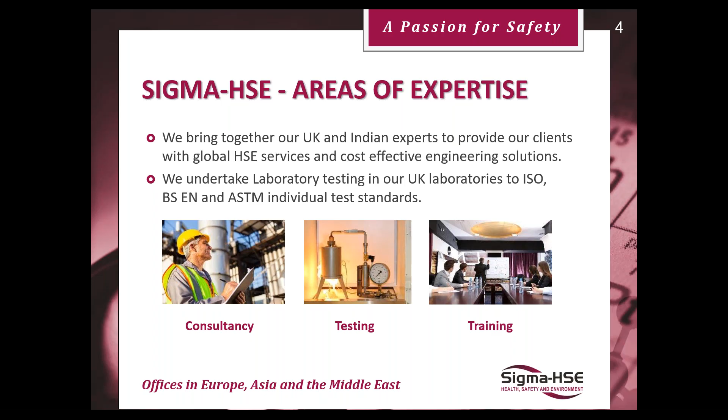We've got a team of highly qualified engineers and scientists. Some people sit on standards committees, and we've all tended to work within the process industries in one shape, form or another. And of course, we've got the resources of the laboratory for our fire explosion testing and so on.

So we can offer quite a large scope in terms of the things we're interested in doing, and things that these days perhaps many industries, many companies on their own have limited experience in - some of the tools and techniques we use to get a grip on many of these assessments and understanding of hazards.

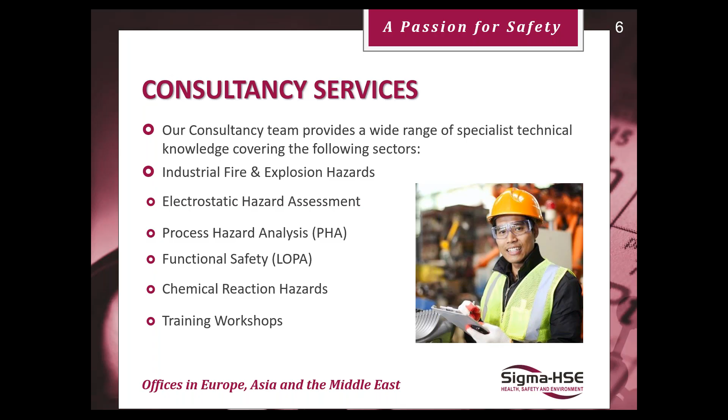So what I'd like to do today, over the next hour, is talk about basis of safety. I'll start off as simple and holistic as I can be on what the basis of safety is, to make it clear in everybody's mind, and what knowledge we need to understand before we can develop that basis of safety.

And we'll then have a look at standard, if I can call it that, basis of safety, because like with everything, there's many ways of doing things. It's the same with basis of safety - there's many options you can take within our processing operations, and I'd like to take you through some of the accepted best practice where basis of safety is concerned.

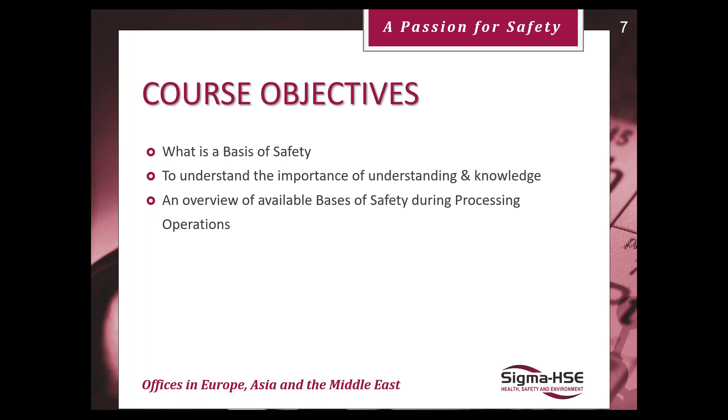So really the definition of basis of safety is a combination of measures, safeguards, barriers - call them what you like - that we rely upon to ensure our safety, to give us some protection. Because on the whole, in the processing industries, we do handle a lot of hazardous materials by definition, and sometimes at quite severe operating pressures and temperatures.

So there is the scope in many of the processing industries to do a lot of harm, either to ourselves as humans or to the environment or indeed to the business.

So the basis of safety is all around putting in place measures and barriers to prevent, control or mitigate bad things that could happen. Clearly, to have a sound basis of safety, we need to understand what can go wrong, because it's only with that knowledge of what can go wrong - our hazard identification and our knowledge about the hazards and when those hazards may become realised - can we then consider putting in place measures, and what types of measure, to deal with these things, either to prevent the hazards in the first place or to control and mitigate them if those hazards become a reality.

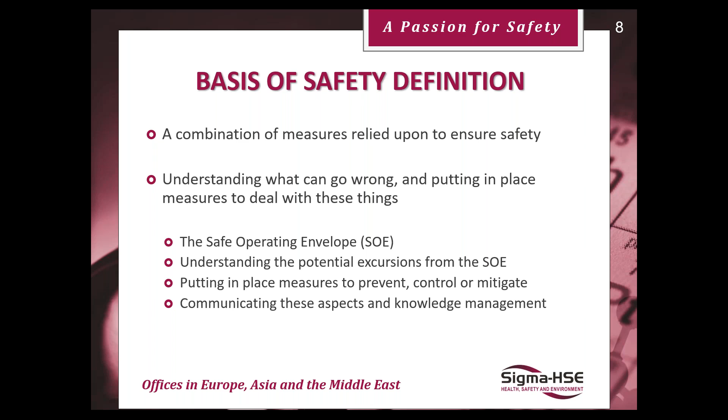So the basis of safety is built up on this knowledge of the safe operating envelope, which, as I say, we're generally quite proud of and quite knowledgeable about.

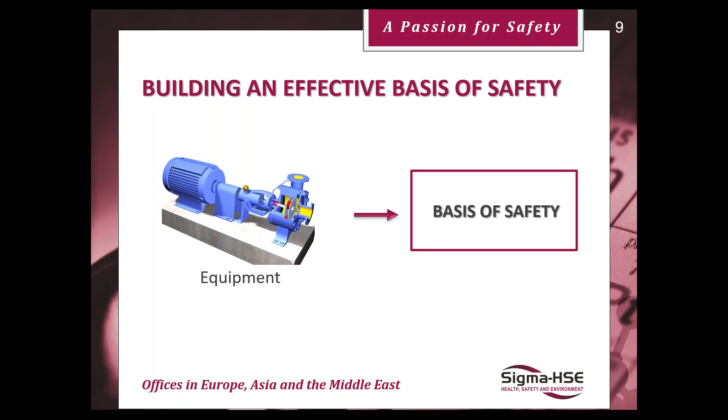And of course, to keep us within that safe operating envelope, we'll have items of equipment that help us stay within that basis. We'll have procedures that we follow, whether we're doing maintenance or operations, to do things correctly.

We need to understand how we're going to detect that we're starting to deviate from our normal operating conditions or processes - this knowledge of potential excursions I've been talking about.

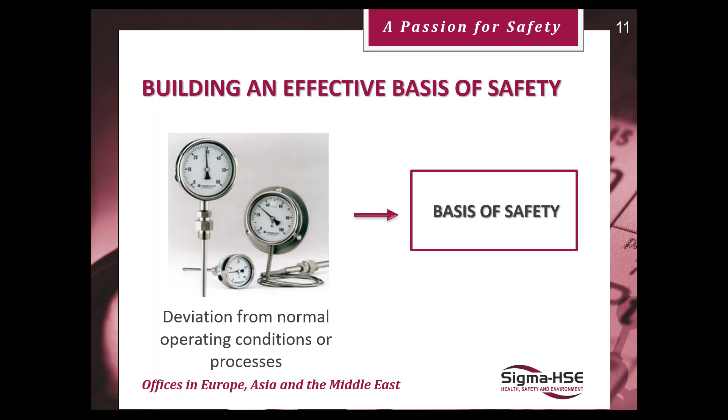Of course, people are involved, so there's an element of human factors there. Do people know how to operate these barriers that we've installed as part of our basis of safety? Have the designers designed them correctly? Do the maintainers maintain them correctly to make sure they're effective?

Because after all, these barriers, these measures we put in place, on the whole should never operate. They're there to give us protection if we go beyond our safe operating envelope. And very often, going beyond these safe operating envelopes is very infrequent - these are often our last lines of defense before something goes really bad.

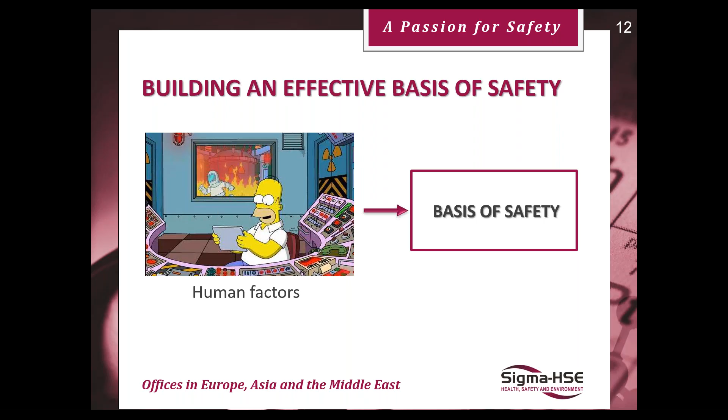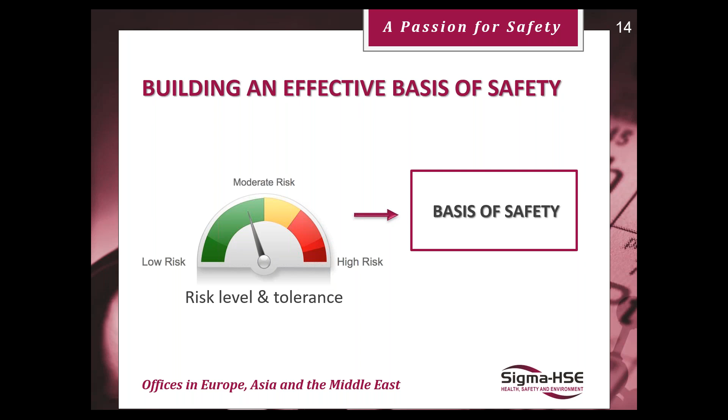We've got to understand the properties of the materials used, because often many of them are classified as dangerous. So all of these things fit in, as well as an understanding that we can't really eliminate all hazards and all risks. There's a certain level of risk tolerance that your company, or the regulator, wants us to take, because we don't want to be wasting money reducing risks that are already acceptably low. So there's an element of making sure that, yes, we can keep adding these barriers, but we need to satisfy ourselves when enough is enough, when the barriers we've got give us the level of protection we require.

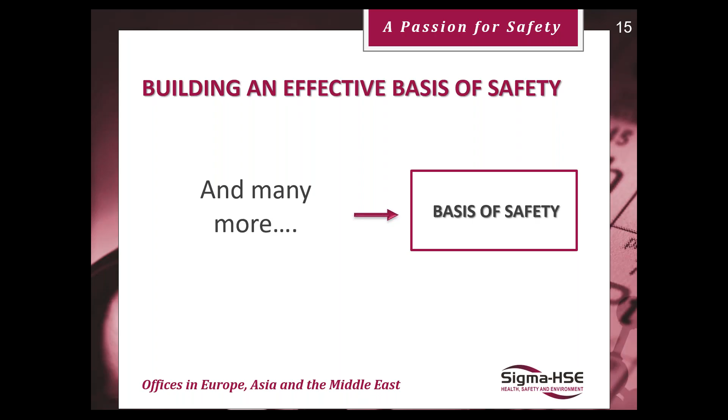And of course, there are many more aspects of it, especially if you're a site that's got significant major accident hazards. The demonstration of this control, the demonstration that the design basis and the basis of safety, and that the equipment and barriers you've installed will be effective when called upon, is—if you have to produce a safety report to put in front of the regulator—quite intensive these days. That demonstration, that justification that what you've done is sound and reduces the risks from those hazards down to an acceptable level. So basis of safety is very important, but we'll get a bit more specific now.

If you look at the ATEX legislation in Europe, or in the UK the DSEAR legislation—the Dangerous Substances Explosive Atmosphere regulations—those specifically use the term basis of safety, and it's a basis of safety to prevent and manage fires and explosions. That's what those regulations are concerned with.

And when you look at them, if you just think about it logically, fires and explosions come about when we allow the fire triangle to be joined up. That simple little triangle says that for something to combust, we need a fuel, we need air or oxygen, and those two need to be within certain proportions. Otherwise, they'll be too lean to burn or too rich to burn. And then we need an ignition source.

So of course, if we're within the flammable limits of a flammable liquid or the vapors from a flammable liquid, one obvious way of preventing an ignition is trying to avoid generating those flammable atmospheres, trying not to work within the flammable limits. That's one way we can prevent ignition—prevent having a flammable atmosphere.

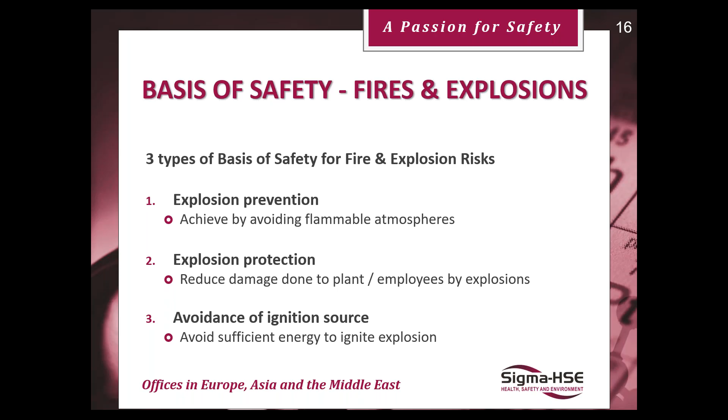So we've got two ways there of trying to prevent a fire or explosion: don't have a flammable atmosphere, don't have a fuel-air mixture, and don't have an ignition source. That breaks the fire triangle. But of course, it might still happen, because we exist in a life that's risk-based, so we can do our best to avoid creating a flammable atmosphere, do our best to avoid having an ignition source, but occasionally it will happen. And therefore, if there is an ignited event, we need to make sure that we can protect ourselves from those fires and explosions, so we're not sending missiles around the plant or off-site, which could harm people and damage assets and so on. So there's an element of explosion protection as well built into the basis of safety.

In terms of explosion prevention, we can limit the risk associated with handling fuels. Can we use a fuel that's less flammable or non-flammable if possible? Because clearly then we can't have a fire or explosion. Can we mix a non-flammable material in with another liquid to increase its flash point? Simply adding water to alcohol increases the flash point.

If we're dealing with powders where dust explosions could be an issue, can we work without having fine powders? One of the best ways of doing that is to keep our powders in damp or paste form. They're not so easily raised into a cloud to form that flammable atmosphere. Or avoid very dusty powders by deliberately using pellets or granules rather than powders.

Related to the fire triangle, we can also keep below the minimum explosible concentration for powders by making sure there's more air there, so there can't be an ignition because it's too lean to burn. We've reduced the fuel concentration when we make a dust cloud to the point where it's not ignitable.

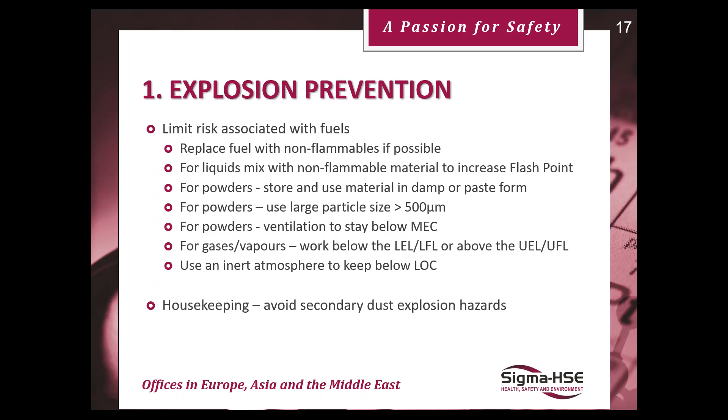We've got to remember that if we're working with combustible dust, it's really not possible to remove the fuel. It's going to be present. Even with most powders, it's all a function of the particle size distribution. As I said earlier, powders are okay if they're larger than about 500 microns. But many powders can undergo attrition and break down over time, or if you're transporting them in screw conveyors or pneumatic transfer lines, very attritable powders can break down and create more dust. So it's a bit difficult to remove the fuel.

For gases and vapors, we can do this by having sufficient air that we're below the flash point, below the lower explosive limit, and ensuring our systems operate that way so we can't have an ignition. Some processes do work above the upper explosive limit. Lots of printing processes are designed to operate above the upper explosive limit when handling solvent-based inks. Although these days there's a lot less solvent-based inks used in processes than there used to be. There's many more water-based systems now and cleverer systems, which has inherently removed the possibility of a flammability issue.

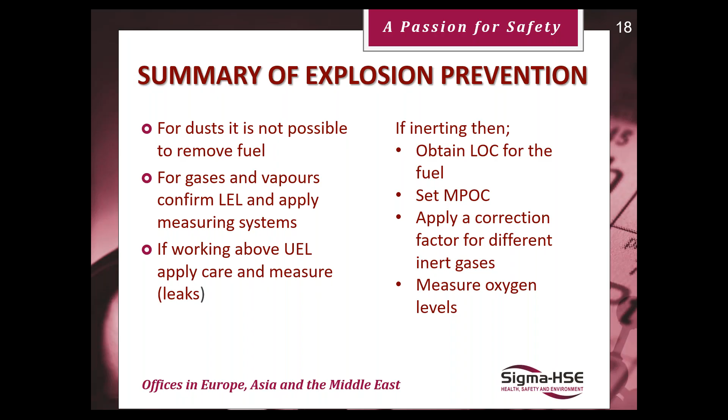And of course, as I said before, we can inert, but the inertion's got to be good enough. How much oxygen is required for a given substance to burn or explode is dependent on the specific substance. It's called the limiting oxygen concentration, or the maximum permissible oxygen concentration. If you're using inertion, you need to be below these values and know that you're below them, to give yourself justification that you've reduced the oxygen level in your systems down to a level with a safety margin that won't ignite. Then you're protected against the fires and explosions that could occur.

When we're looking at explosion protection, when we try and put things in place to deal with having the ignited event, these are generally done for fires and explosions in three ways. We can either contain the explosion, we can vent the explosion overpressure to a safe location, or we can suppress the explosion by injecting extinguishant into the incipient explosion.

But with all of these techniques, because we've got different bits of equipment generally in series or in parallel linked to each other, we've got to have means of isolation to stop the flame front or the explosion pressure trundling off into the next piece of equipment upstream or downstream. Of course, there's different ways of doing this, and I'm not necessarily going to go into the detail of the different levels of containment.

I think it's self-evident. With containment, we have a knowledge of what the maximum pressure and the rate of pressure rise is if we lose control and have the ignited event, and we make sure that the containment system can withstand that maximum pressure and rate of pressure rise, so nothing comes out of the containment vessel. The explosion's contained within it.

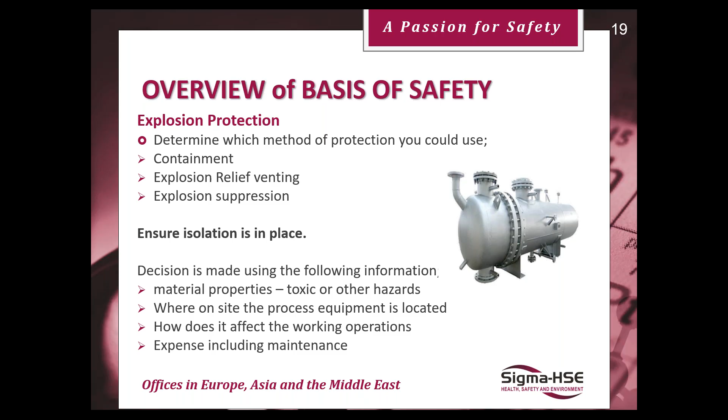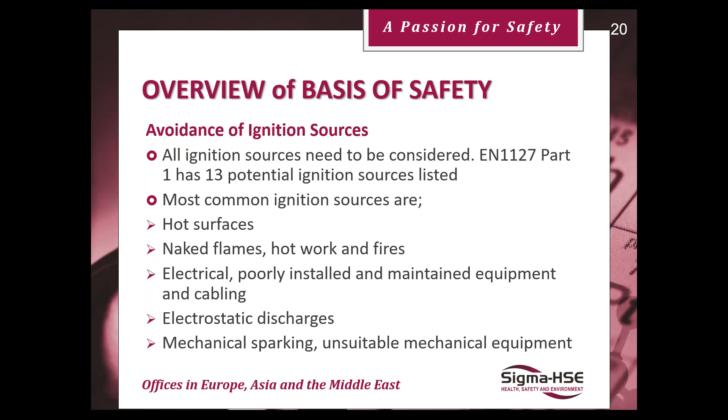But as I say, process safety specialists tend to work on the premise that basing our basis of safety purely on elimination of ignition sources is something that we don't feel comfortable with, because it's very difficult to eliminate all potential sources of ignition all of the time.

But it's important that if we do get that ignited event, things can get a lot worse if we don't have this isolation between items of equipment on our plants. If that fireball and overpressure can go down ductwork into other pieces of equipment, the pressure, by things called pressure piling, can essentially be a lot higher than what it was in the first place.

So you might have a P max, for example, maximum pressure developed in an explosion in one reactor that's, let's say, 8 bar. But if that was to go through to a similar reactor, because they're connected, because of this function of pressure piling, you might see 10 or 12 bar in the second reactor. So even if it's rated as 8 bar, it still won't do the job. So having this rapid isolation - and we can do that in a number of ways - quick acting valves that will require some detector system again to shut.

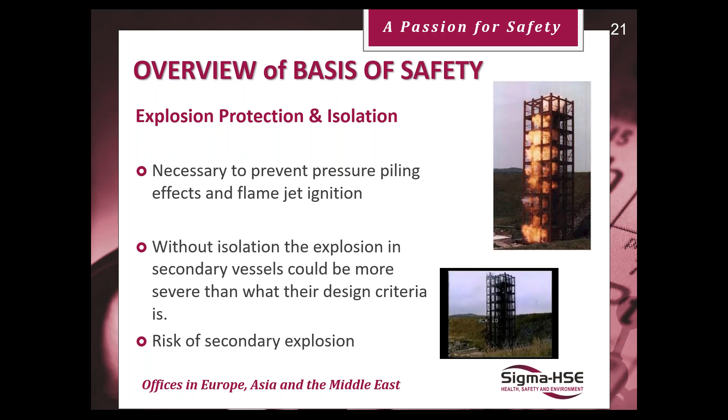But of course, we must have that knowledge of what we need to do to be able to get ignition. So the sorts of data that's really important to us when dealing with gases and vapors and trying to avoid fires and explosions is knowledge of the flash point - the lowest temperature at which a liquid will give off sufficient vapors, which if it comes across an ignition source, it will flash.

And if your flash point is less than ambient temperatures in the UK, that means if you spill it, if you have a loss of containment, it will give off sufficient vapors to be above the lower explosive limit. So if there is an ignition source, it will become readily ignitable.

Auto ignition temperature is another important parameter we can use to make sure that equipment that runs hot isn't hot enough to ignite material. Auto ignition - release of the substance at above that temperature will ignite. It doesn't need a separate source of ignition to ignite it.

You've got to be careful with auto ignition temperature. You'll find it easy to pick up auto ignition temperatures from the literature for all manner of solvents that we use in the process industries, and they're pretty high - generally around 400 degrees and this sort of thing. I think the auto ignition temperature for something like hydrogen is around 500 degrees C.

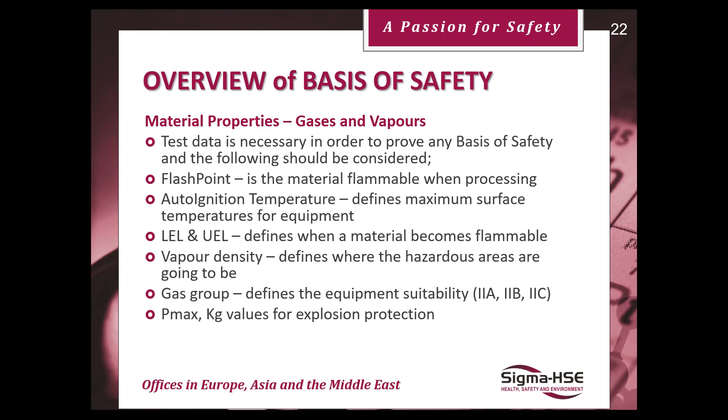When we look at powders and dust, it's a bit more involved, but again, it's just measurements, and there's an awful lot of physical data out there for flammable vapors, liquids, and gases. You don't really need to do much testing.

But where powders and dusts are concerned, there's less available in the literature, and what's quoted really gives you a false sense of security, because the problem with powders and dusts is the particle size distribution and the amount of dust that's present and how readily that dust forms into a cloud.

If you look through the literature for things like minimum ignition energies, minimum ignition temperatures of standard materials - flour, wood dust or whatever - you'll find they never quote what the particle size distribution is. So it's always best with powders and dusts, if you're using particular substances, to get those specifically tested in laboratories to get at these figures.

Because in many respects, the minimum ignition energy is what it says - how much energy do you need for this particular material, how much energy is necessary for it to ignite. And that can range from tens of joules down to literally 1 or 2 millijoules. There's a big difference. Some things are a lot more frisky than others.

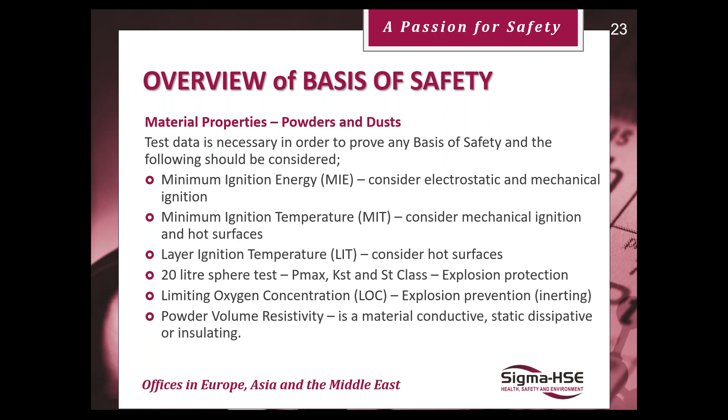And it's the same with minimum ignition temperatures. Some things have got to be really hot before they'll ignite. Some things will go at relatively benign ambient temperatures. We can all get at this sort of information from the testing of the material properties.

Moving on, I've looked at fire and explosion, but basis of safety is also important when we look at reactive chemistry, because we need our basis of safety there. We need measures in place to deal with excursions from our normal reaction chemistry, because if we lose control of our reaction chemistry, all manner of things can change. Kinetics can change, thermodynamics can change.

We can change the chemistry altogether and make totally different materials. For example, if you remember the Seveso incident in Italy, the normal chemistry they were doing was quite benign, not really using any dangerous substances. But if it got too hot and went into exothermic runaway, the chemistry changed and they started producing dioxins, which are very toxic materials. Although they didn't blow the plant up because it was protected against pressure via a vent on the reactor, the chemistry had changed and made all these dioxins, and it was those that were sprayed out of the vent all over the neighbouring countryside, which harmed people and harmed the environment. So it's this understanding of what can go wrong.

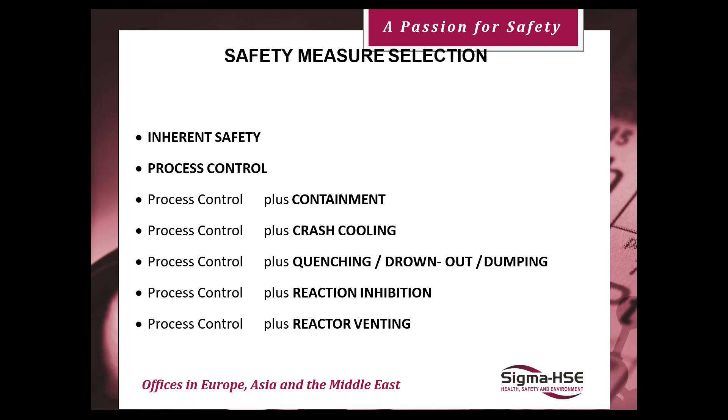The first way is inherent safety, where we ask: if we lose control, would it cause a hazard? It's often considered a theoretical concept, because as humans we don't like changing - if we've always made this stuff this way, then this is the way we'll always do it. But it's about questioning, can we do things that are inherently safer? Can we eliminate those hazards? We can only do it at the really early stages. It's a technique chemists should be more and more involved in, looking at inherent safety.

Do I need to use a high volatile solvent with a low flash point? Could I get away with one that's a higher flash point? Can I use a catalyst in the system rather than having to operate at high pressures and high temperatures? Very often, if we can design out hazards and remove hazards, our plants are a lot cheaper to build, and cheaper to operate throughout the lifetime, because we're not having to put all these measures in to deal with these hazards, which we generally build into our processes.

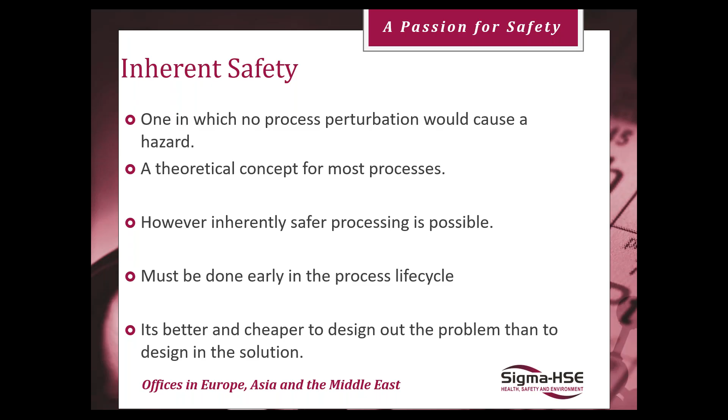So inherent safety is around specifically thinking about: can I substitute this material? Can I use a higher flash point solvent? Do I need to operate at pressure? Can I minimize the quantities?

This is where we've done a fair bit of work over the years. It's very rare now, outside polymerizations, that we see batch reactors where we put all the ingredients in, shut the lid, warm it up and let it go on. We tend to use semi-batch and increasingly continuous processing for our chemical reactions, and these allow us to minimize quantities.

I can't have a release of 10 tons of a toxic material if I've only got 2 kilos of it floating around the reactor system at any one time. Can I moderate it? Can I use catalysis to help us operate at lower temperatures or lower pressures? And can we try and keep it simple? It's something which just requires a different thought process in the early stages of process design.

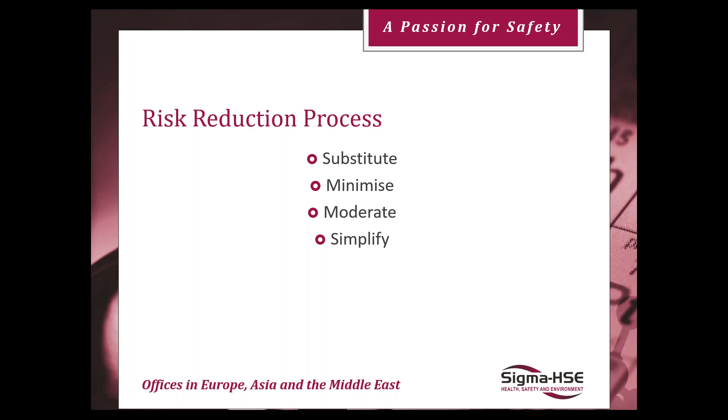It's a nice to have, something we need to focus on more as we go through life, and we're being pushed to do this more in Europe, at least by the regulators. But it's fair to say it's not common to put new processes in anymore, so we have to live with our existing processes. We need to understand the basis of safety that's there for our existing processes.

I've given this simple little example here, and I've come across this numerous times. Reactors are heated by steam - here's one, it's got 300 degrees C steam input to the jackets on the reactor, and they're doing chemistry where they want to do the reaction at 85 degrees C.

One of the excursions you'd look at, and they knew about, was if the reaction mass got up to 160 degrees C, they had a thermal decomposition that resulted in a lot of gas generation and a runaway reaction. So something they tried to avoid.

So they did lots of work and put in big relief vents on the reactor and everything else. If they'd simply plumbed the reactor cooling heating system to use hot water rather than steam as the heating medium, hot water can't go above 100 degrees C. You've got a comfort margin of 60 degrees C before your onset temperature for decomposition at 160 degrees C. You've effectively eliminated the possibility of that decomposition.

It's inherent safety in practice. We need to get used to this. The only reason why steam was used on that actual reactor for this product was because that's what it was plumbed in as, and had been for years.

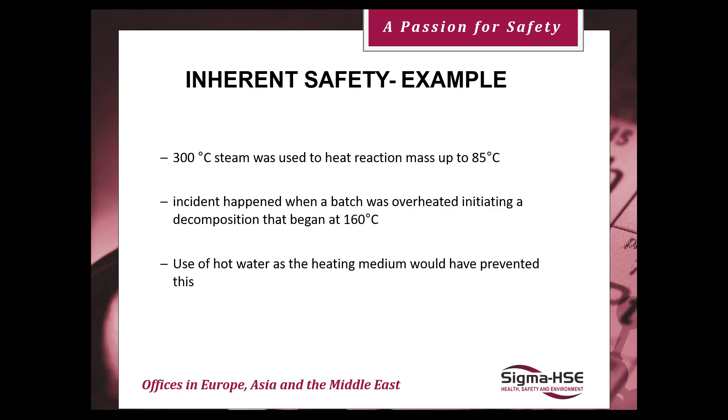When we look at this, the same concept applies with our reaction chemistry. I mentioned before about safe operating envelopes. It's understanding that chemistry, the boundary that keeps the control reaction. Not only will it be safe within the safe operating envelope, it'll be productive as well. It will give us the material in the correct yield, the correct quality, and so on, if we keep tight control of the safe operating envelope.

But it's this excursion beyond it. And when we're doing reactive chemistry, those excursions are going to be related to things like the thermal instability of the reactants, mixtures, products, or intermediates. What happens if these products get too hot, essentially? Are they exothermic reactions? Many of our reactions in the processing world are exothermic, so they raise the temperature. If we get exothermic runaway, does it lead to decomposition or simply violent boiling? Or do we start generating gas that we've got to deal with?

We've got to understand how far we are from our normal operating conditions against some of these things happening - against the materials falling apart, against getting violent boiling, against getting decompositions that generate gas. And then we can put measures in place to make sure we're operating below these so they don't happen.

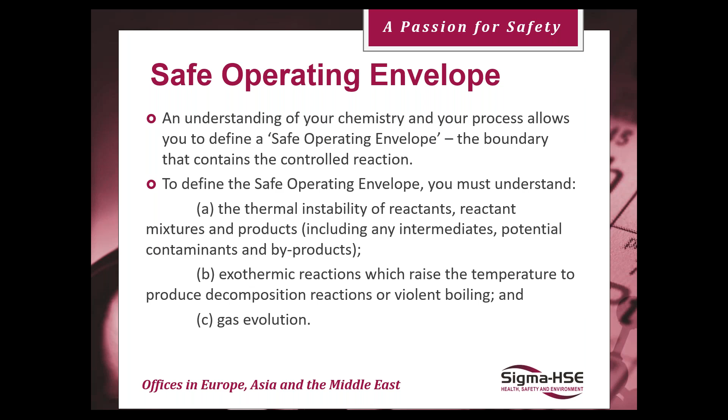And you do this by what's called chemical reaction hazard testing, where you test under adiabatic conditions. What that means is you use calorimetry to try and reduce the losses of heat that you may have, keeping the heat in the system, which gives you the worst case.

In the laboratory, when we're using glassware and things, an awful lot of heat of reaction is simply lost through the walls of the test tubes and flasks, so we end up having to heat the reaction. Once you start putting them in large volumes on plant scale operations, that heat loss is minimized greatly, and a lot of that heat remains within the reaction mass, which you've got to somehow get rid of or control.

So doing our testing on reaction chemistry, we can say, well, what happens if the agitator stopped during the reaction and then the operator turns it back on, or if there's insufficient cooling, or if we charge the reactants in the wrong order, or put too much in, or not enough, or at too high a temperature or too low a temperature.

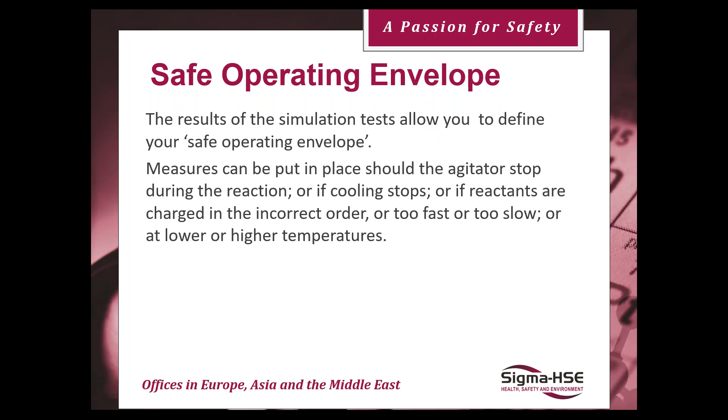It's this sort of knowledge we need to know so we can find out what's going to happen in terms of the excursion, and then with that knowledge we can put measures in place. Our measures would be, for example, using heating mediums where the maximum temperature doesn't cause any of those things to happen, or putting restricting orifices in our feed systems so we can't put too much material in. In a semi-batch situation, what you're trying to do is feed in one of the reactants at a rate where it's consumed almost instantaneously in the reaction mass. We're trying to avoid what's called accumulation.

If you start getting accumulation and it's an exothermic reaction, you start developing heat. All you need to do is shut off that feed and the reaction will automatically die, the temperature will come back down, and you'll come back into control. You can't do that on a batch installation where you put all the ingredients in, shut the lid, and then put the heating on. If that thing decides to exothermically react and the cooling fails, for example, there's not a lot you can do.

There is, and I'll discuss them in a minute. But generally, it would be better if you could feed in one of the materials at the same rate that it's consumed. Then if you do get temperature or pressure excursions, you can simply shut that feed off and kill the reaction. So there's many ways you can do it, and we'll look at those now.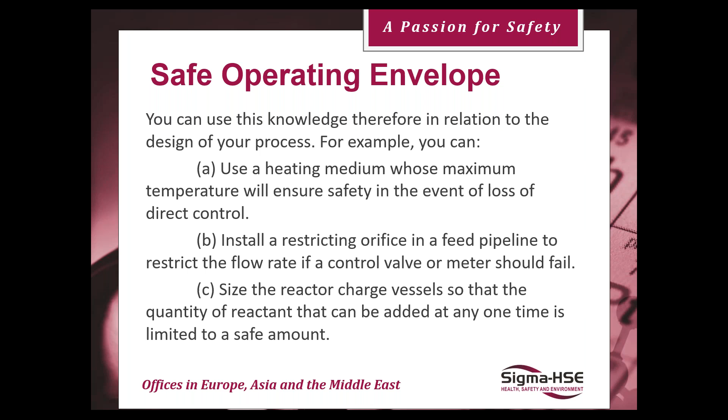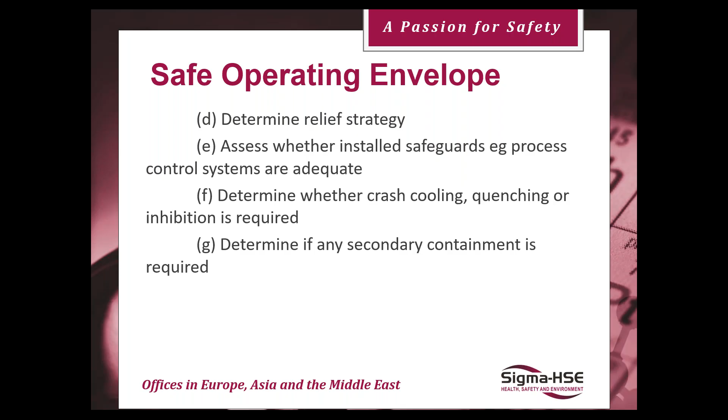Once you've got that knowledge, when we look at our different basis of safety, that data will allow us to choose an appropriate basis of safety, which might be relief, it might be installing very good process control systems, but there's many other ways that we can stop excursions from reactions occurring - crash cooling, quenching, and so on and so forth. We'll just have a little look at these.

Obviously, we'll have process control on all our chemical reaction processes, whether that's operators just running around opening and shutting valves in sequence, or these days generally it's SCADA systems and DCS systems with alarms that tell us when it's getting too hot or the pressure's going up. So it is possible for your basis of safety to be process control.

It might have to be very high integrity process control if that's the route you're going down, and you may end up having to put in safety instrumented systems and a functional safety management system and everything associated with safety integrity level equipment. But it can be done, because all you're really doing is putting in high integrity, or turn it around the other way, high reliability stuff that should stop these excursions from occurring by using process control.

The sort of information you need to do this properly is a good understanding of what your optimum process conditions are, what your safe operating envelope is, and the impact of maloperations on that. A good understanding of onset temperatures of anything undesirable - what's the onset temperature of a decomposition, or onset temperature of an exothermic reaction, these sorts of things. Or temperatures below which you don't get that reaction.

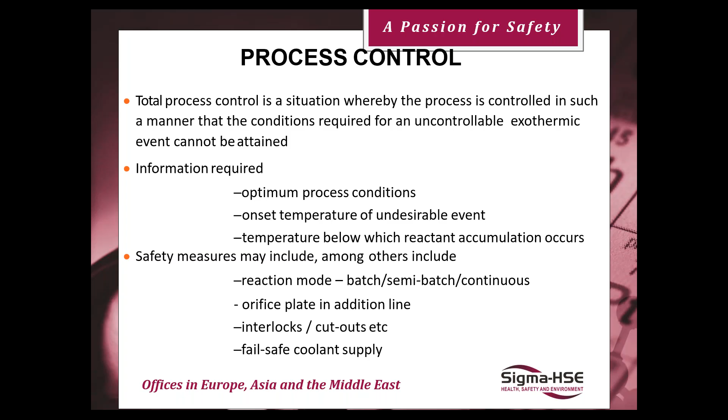And invariably we'll have some level of process control on any reactive process. But we can also have process control plus containment. We talked about containment being one of the basis of safety. Basically, if we do have a runaway reaction or a decomposition or whatever, it doesn't matter, because the reactor and everything hanging off the reactor is rated to a pressure higher than the pressures and temperatures that could occur under that runaway situation. It's as simple as that. But clearly you need to know what is the worst case scenario, what could develop the highest pressure.

You need to get at that sort of data by doing reaction calorimetry, under worst case conditions, which is adiabatic conditions. Essentially removal of heat to atmosphere through the process plant is taken out of the equation. Then you can build your pressure vessel and all the ancillary equipment to deal with it. So it's a recognized way of doing it, but it's not very common.

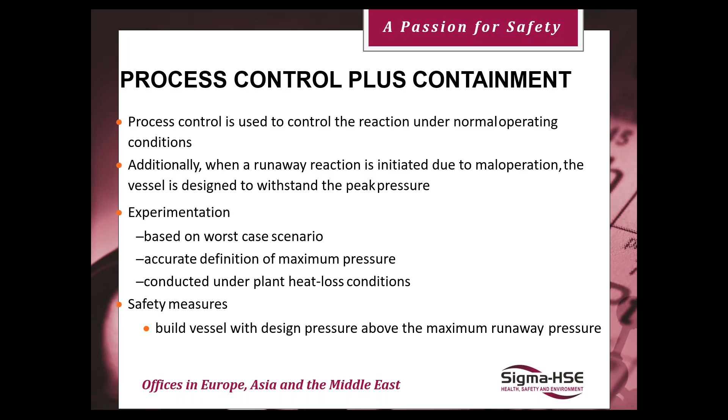We can also control systems by having process control and crash cooling. So if we start having a runaway reaction or a decomposition, we effectively have some emergency cooling facilities. And of course, you need to know how much heat you need to take out of the system to stop the reaction.

You need to base that on the worst case scenario. You need to have some understanding of how the power output profile between your heating and cooling curve occurs on your plant. So it's calorimetry time again. But you need that to make sure that whatever your emergency cooling, crash cooling does, it's got to be good enough. It's got to take out the heat that is necessary.

So once armed with that information, we can select how we're going to cool the system, select the cooling medium, which in our world is usually water, but doesn't have to be. And then, don't forget, you've got to have a system that picks up and can activate that cooling system. That needs to be of sufficient reliability. You can't build this sort of system and rely on an operator to pick up that the temperature's gone too high and then open a valve. That's not what's required by a basis of safety using process control and crash cooling.

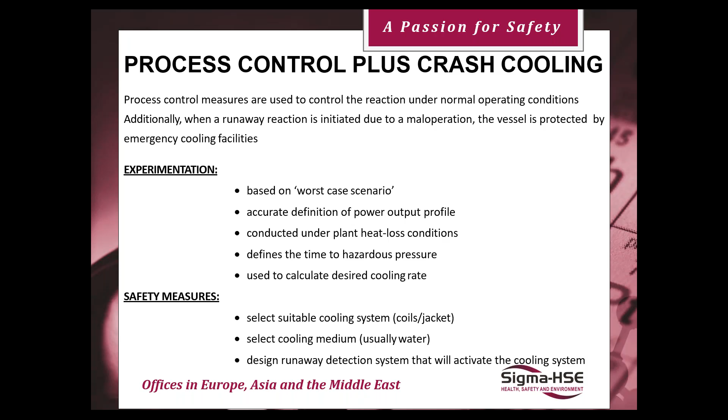Another way of doing it is to simply get rid of the contents of the reactor. So if a runaway starts to happen, temperature and pressure start going up, we can quench the reaction, we can add a cold diluent to the system that will take the heat out of the system.

Of course, to do this, your reactor needs to be big enough to take this quenching liquid. It needs to be put in rapidly and at the right point, or we can drown it out so we can dump the reaction contents into another vessel that already contains this cool diluent.

Or we can do what's called dumping. We can simply dump the reaction mass into a larger vessel, and just by virtue of doing that, we reduce the temperature, and if we have a large ullage space, we'll reduce the pressure. This is often used with relief as well. You'll often see a dump tank on the output from a relief system. So the reactor is relieved into a dump vessel, and within the dump vessel, the reaction is effectively killed. That's another way of doing the job.

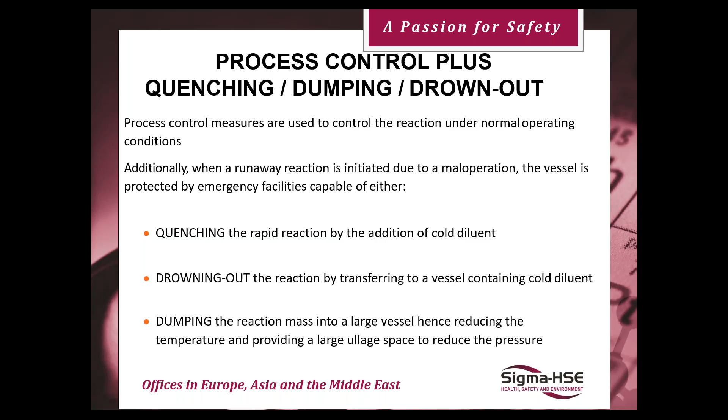We could also use reaction inhibition. What this basically means is detecting something - we need to stop the reactor, we've detected something's going wrong. Now we put something into the reaction mass that inhibits or kills the reaction.

This can be done, but we need to understand what the worst case scenario is and try out different types of inhibitor under worst case conditions. We've got to make sure, because we're injecting it in, that we get good mixing and all the rest of it as well. So that determines how many injection points we need and where they need to be.

These systems are installed out there, but again, they rely upon a high integrity detection system. So it's always process control plus reaction inhibition.

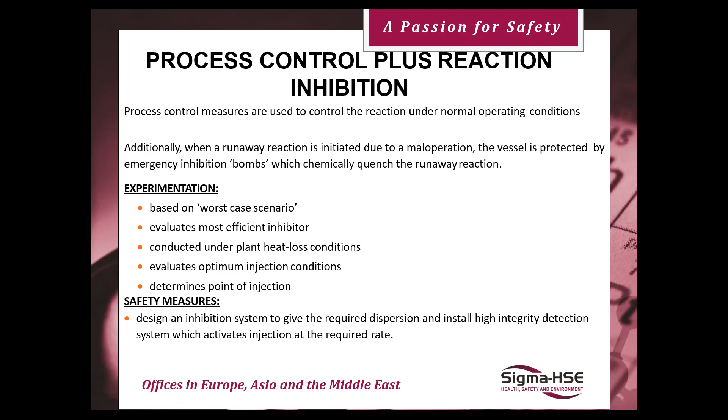And then the one that we normally see on our processing plant is a vent. So we simply vent the contents of the reaction to a safe location. Again, to do this properly, to size the vent area necessary, needs to be based on knowledge of the worst case scenario, knowledge of the reaction kinetics, and the temperature pressure relationship. It's calorimetry again - calorimetry under adiabatic conditions is the testing that we need to do. We can do some calculation on this, but we really do need experimental testing.

Venting, there's different types of venting phase. We can have different means of venting, whether it's just venting vapor or it's venting froth. If you think about boiling water and compare that with boiling milk, well, those two extremes can occur in your reactor masses. You might just get vigorous boiling like water and we just generate steam and off we go. You might get like boiling milk, where you get a many-fold increase in volume, you get swell, and you get a foam. And all these sorts of things impact how you size that vent.

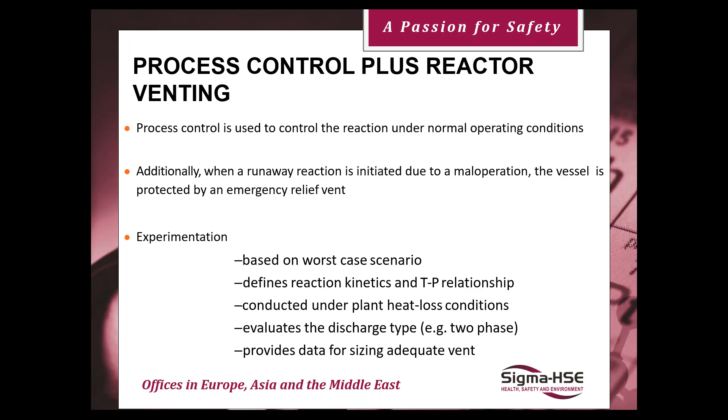There's a lot of data that we need. So just to finish off, in the last couple of minutes, I've got a last few slides on all of this. Of course, your basis of safety needs to be worked out, justified, written down, used and kept within the business, and not forgotten. And so that allows you not to forget why that vent was designed, how it was designed, what data was used, what the calorimetry was, and all the rest.

And my experience is an awful lot of industries, processing industries, they've got the basis of safety, but they've lost the knowledge. They've lost the calculations that were done. They've lost the calorimetry reports and things like this. Okay, so we're lacking there.

A good system will have policies and procedures that push you to identify chemical reaction hazard testing, especially for reactive chemistry. It will push you for how you're going to identify flammability testing, and so on and so forth. And of course, your management system needs to be good enough to act as a good knowledge management system.

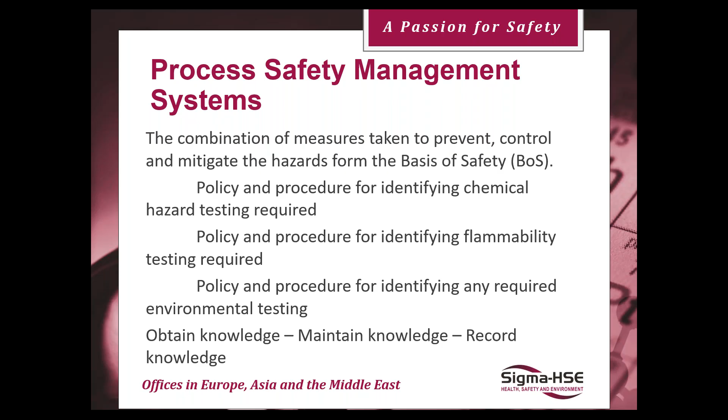All of this comes back, if you think about it, to understanding what can go wrong, and that comes back to your original hazard identification analyses, how you've identified the hazards, whether that's by HAZID or HAZOP or LOPA or a combination of them or whatever.

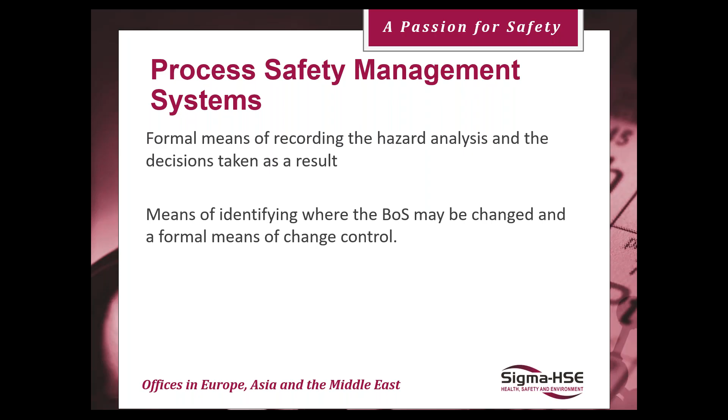And of course, the basis of safety may change over time because you make changes to the process or you make changes to the plant and so on and so forth. So your management of change system is also a key element of process safety management.

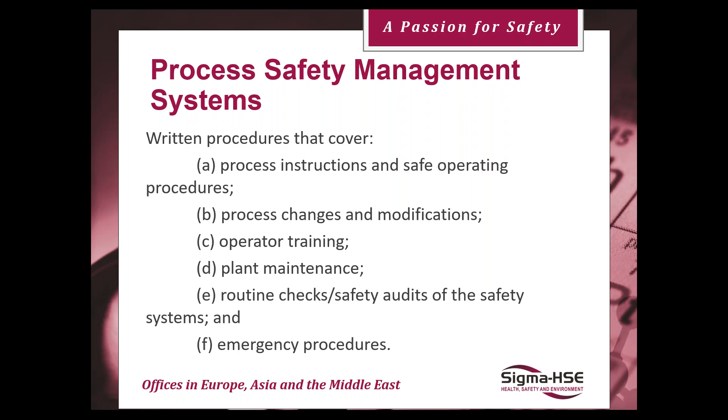And of course, all of that knowledge, all of that understanding should be fed into your process instructions and SOPs, your training, your audit systems, your emergency plans, and so on and so forth to make it a totally sound system. It isn't just the technical equipment side of things. Yes, somebody's got to have used the correct codes to be able to size the vent, obtain the correct calorimetry data to be able to pull the data out to size that vent and everything else. And if you've got competence lacking at any stage, then you'll lose it.

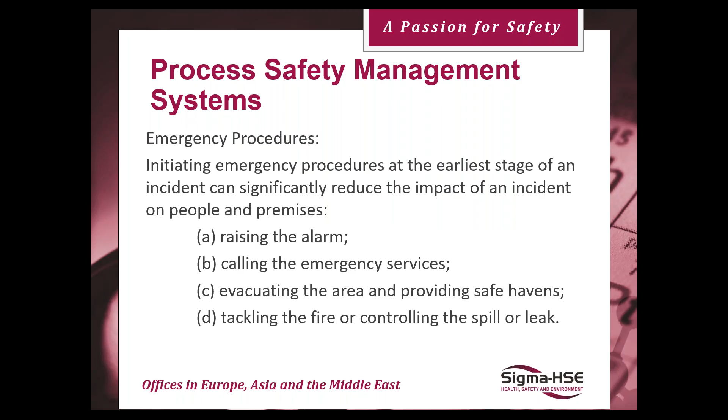I've gone slightly over time, but hopefully you found it enjoyable. You know where we are.